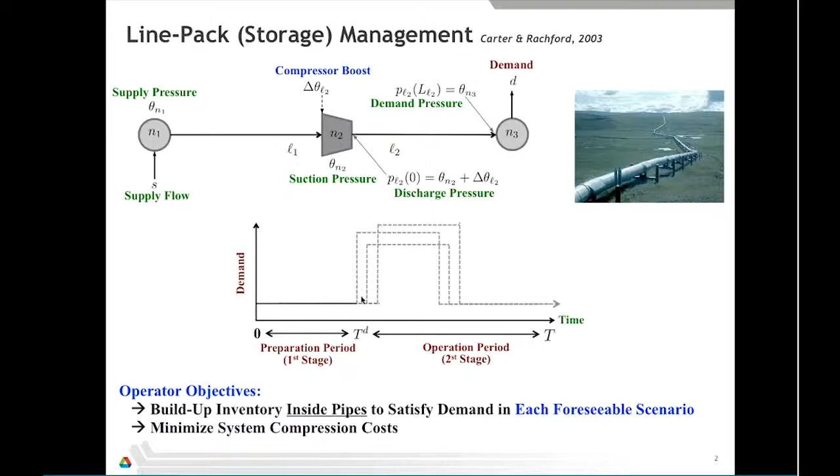Right, so that is the basic setting. Why are we looking into this problem?

I honestly think that one of the big reasons why the gas market is so important for all of us is because it's tightly connected to the power grid. One of the big issues the power grid is facing right now is that they still have very drastic, non-negligible fluctuations of prices. Here I'm showing you some prices for the Illinois system in 2009. It's very typical to observe these very high spikes of electricity prices. In Illinois we have an average price of $40 per megawatt, but this price can go as high as 200 to 300 in certain periods.

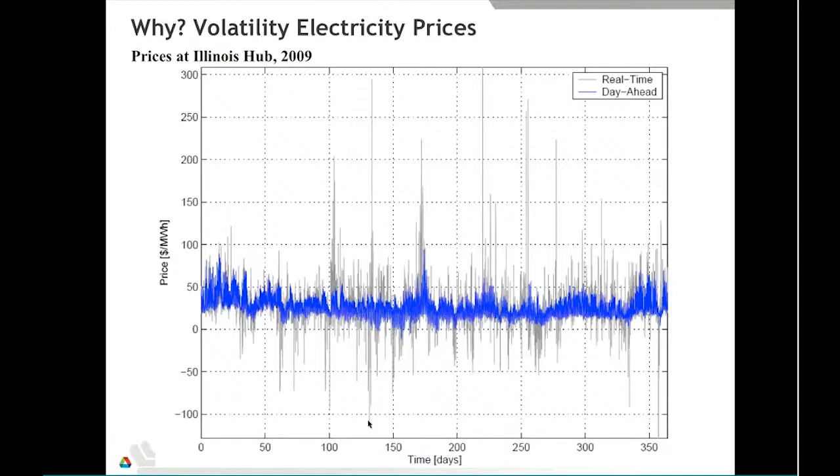Prices can actually become negative, which seems a little absurd, but it's true, because you have periods or moments—it doesn't have to be a long period of time, you can have time instances of 5 minutes, let's say, where you actually have too much electricity and you need to pay people to use it. So this is not uncommon to have. This is an interesting problem.

Volatility in the power grid is also observed not only in time, but also in space. So when you have periods of scarcity, because you have, for example, transmission lines that are congested, or power plants that cannot ramp up or down sufficiently fast, then you get these periods of either scarcity or excess, and that's what drives prices.

During a period of high stress, the price field just distorts completely, and you can have very weird price profiles. So, for example, here what you see—and these are real prices, so I want to scare you a little bit—essentially, somewhere around here in Iowa and Wisconsin, you can observe a price of around $1,000 per megawatt. And somewhere here in Illinois, we're observing prices that are exactly the same magnitude but negative—minus $1,000 per megawatt.

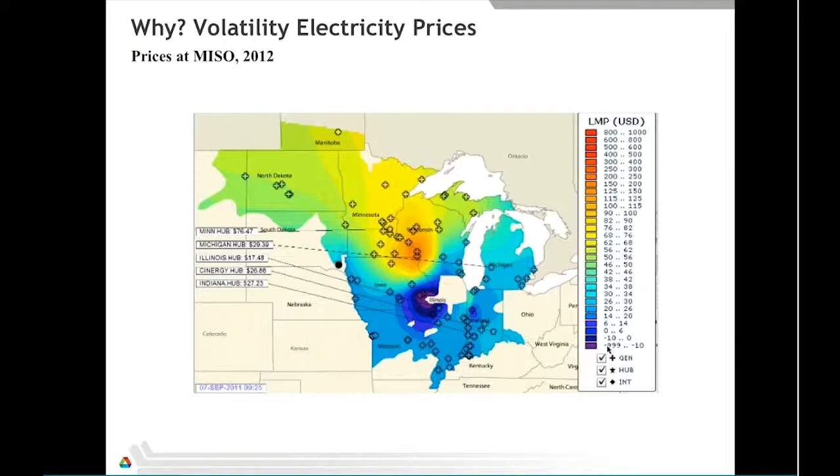So what is happening is that nowadays we still have a lot of very extreme volatility in prices. One of the reasons for this is that it's a typical problem that we don't foresee enough how things are going to happen. We don't get ready for it, we don't prepare, and then we end up positioning these power plants in places where they cannot ramp up or down, and that creates these periods of scarcity, which creates these very strong distortions in prices.

So things are getting worse because of wind power. The unique feature about wind power is that the uncertainty profile it follows is something we have never seen in history. Demand profiles are actually quite predictable—there are some uncertainties, but this is strongly linked to behavior and ambient temperature, and people have beaten that problem to death. But the problem with wind power is that it depends more strongly on other meteorological factors, and it's a little more complicated to predict. So here I'm illustrating some wind ramps, how typically they can simply go completely from a 50% ramp down of total capacity within an hour.

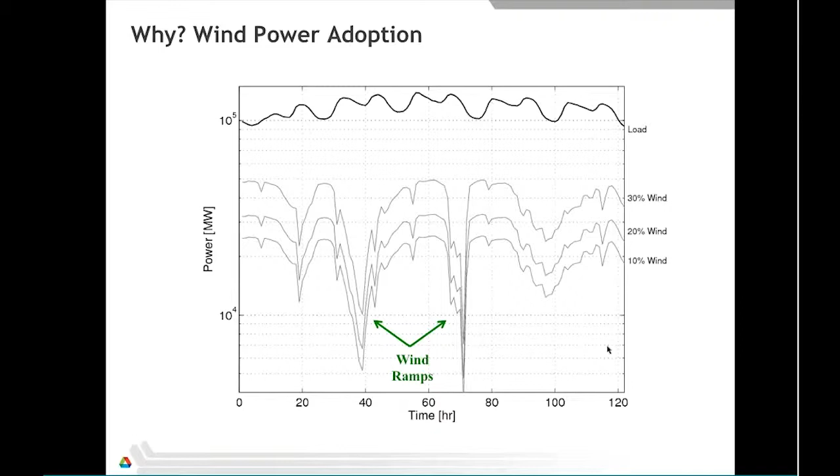This is one of the reasons why natural gas is becoming very important, because in places where you have a lot of wind power, you also need some sort of natural gas type power plant, because those power plants can start very quickly—things like combined cycle power plants, called ramping units in the power grid. So I'm essentially trying to frame why we're looking into gas pipeline optimization. I think there are very interesting synergies between natural gas and electricity that open a lot of opportunities for us chemical engineers, optimal control people, and optimization people.

Some of the challenges and opportunities of this interaction of natural gas are the following. As I mentioned, gas is essential to enable large adoptions of renewable power because of combined cycle plants.

Electricity markets actually drive a large fraction of gas markets precisely because of the real-time market. People that own combined cycle plants are actually looking for periods when the spot price or real-time price just goes to a very large value, like 1,000. That's when they make their millions of dollars. Seriously, just by operating within an hour, they can make a lot of money. So there are some very, very strong economic incentives there.

Some of the challenges is that natural gas loads are very different from power grid loads. They are somehow connected in a weird feedback loop with electricity markets, because the electricity market is doing what it's doing, and then at some point when they clear the market, they're going to decide to allocate this combined cycle plant, and without much notice, they're just going to start the unit. Then the gas pipeline operator has to figure out what am I going to do next. So forecasting or modeling these uncertainties of demand for natural gas is very hard.

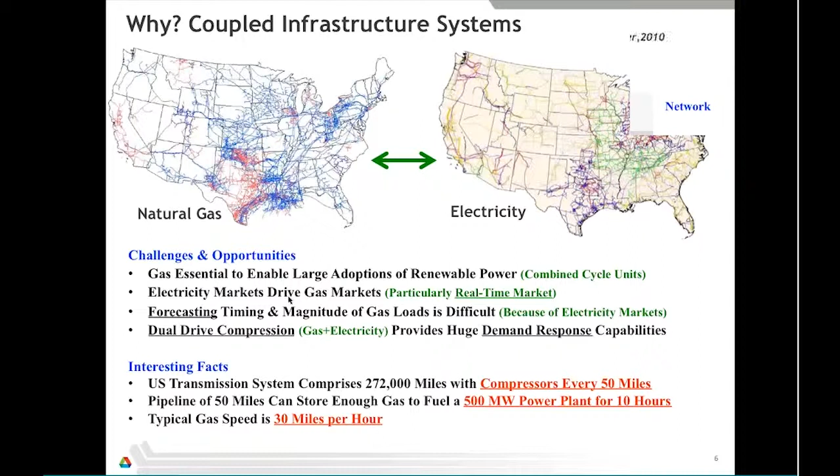So let's move on. Don't pay attention to all the equations at the same time, because I always make this mistake, it's part of my nature of putting all the equations there. But essentially, let's go line by line.

Essentially, we're talking here about a large network. The network has these balances in each one of the nodes, so you can think of multiple links and multiple nodes. The links are going to be the pipelines, and the nodes are going to be potentially compressor stations, or simply nodes where the pipelines have their junctions.

So here I'm defining these inlet and outlet flows for each one of the pipelines. Each one of those pipelines has a flow coming in and a flow coming out. For a particular node, you can actually have supply flows, and for certain particular nodes, you can have demand nodes, or demand flows, I'm sorry.

So I'm also here specifying these sets. This set N is the set of all possible nodes in the network. T is a set of times, or time steps. Omega is a set of possible scenarios. So here I'm essentially specifying my physical model for each possible scenario, and later we'll figure out how do we actually make the decision under uncertainty.

Now, the dynamics of each one of these lines, which makes this network different from power grid networks, is that you actually have dynamics that are significant, you have conservation and momentum equations. So in one dimension, it actually looks something very simple. It's computationally complex, but it's actually not that terrible.

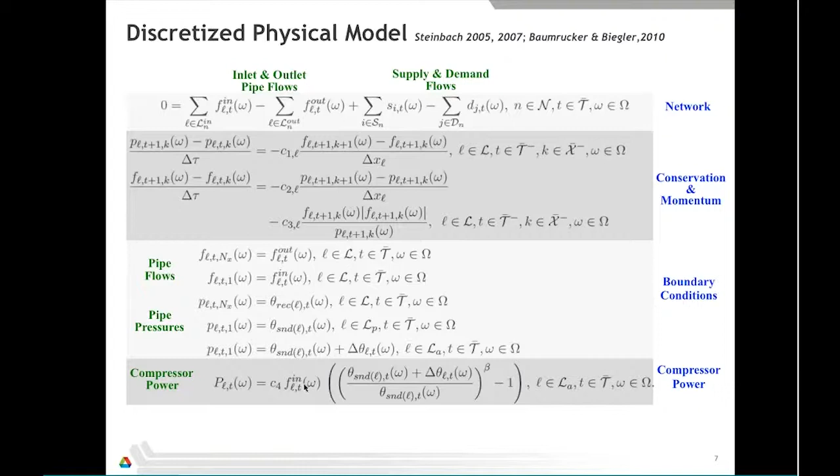Now this model is specified for each possible scenario. You have time and space dimensions. So let's move on. What makes this problem interesting from an optimal control standpoint is how do you actually determine what are degrees of freedom? What are controls and what are my states?

This becomes very important because when you have a DAE system, for certain types of models it's easy to specify initial conditions. But for certain types of problems, it's actually very hard to specify consistent initial conditions. So this is why you have to go to the trouble of characterizing the model.

So essentially, the variables that you have in the system, this is the total number of variables. You don't have to remember all these details, but essentially it's 2 times the number of links times the number of discretization points in space, plus 2 times the number of links, number of nodes, number of supply flows, number of demand flows, and number of active compressors. The number of equations is that many. So what that means is that the number of degrees of freedom is the number of supply flows, the number of demand flows, and the number of compressors that you have.

Typically, the operator does not have control over supply flows or supply pressures. Someone else is sending gas for him, and the supply pressure is already fixed. So that actually kills a degree of freedom, or a set of degrees of freedom, and that just leaves the degrees of freedom to be the total number of demand flows and the total number of compressors.

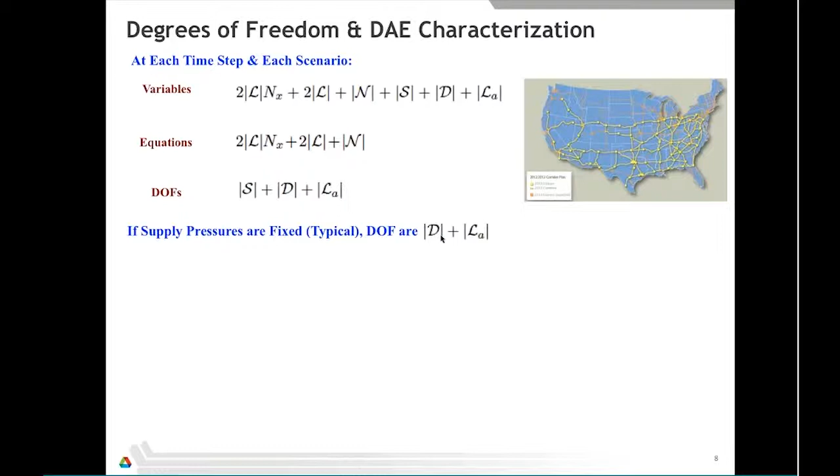So what are the implications of this little analysis? Well, one of the issues here is that you cannot fix demand flows. So you might think, well, I want my system to operate and I'm going to fix the demand that I want. Well, if you do that, and on top of that you say, I want this demand flow and I want it at this pressure, it turns out that if you specify those two constraints, the system does not have enough degrees of freedom. That is impossible. There's no way of satisfying the full set of constraints if you want to be overly aggressive.

So typically what people do is they say, well, I want my demand flow to be fixed, and I'm going to allow for a range of demand pressures that I'm going to allow you to be around. This range can be very narrow, but I'm not going to just fix it for you. So that's an important thing.

So if you fix the flows, then it turns out that the supply flows and the demand pressures actually become algebraic states. This is actually counterintuitive, because you might expect a supply flow to be a control. Well, in this case, it's not. Once you specify the demand flows, your supply flows become states. You have no way of touching them. So the controls are really the boosts for the compressors.

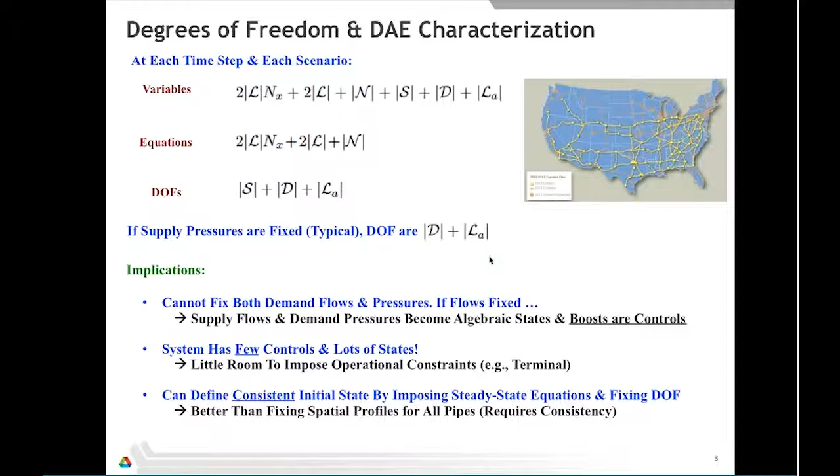All right, the objective function — this is a very interesting problem. This is a very complex PDE constraint optimization problem. The nonlinearity is strong, you have a lot of variables, a lot of ill conditioning. So you have to be extra careful about how you want to enforce your constraints, because these problems tend to be ill-posed. What that means is you might have a multiplicity of solutions — things that give you the same objective function — and the solver struggles a lot with this. But one of the most important things here is how do we actually enforce the constraints.

And this is where constraint softening is actually quite important. So actually I don't enforce the demand flow as a constraint — I enforce it in the objective function. The reason is that, because of the dynamics, there's really no way you can actually enforce the demand at each point in time. Just think about it: if at a certain point in time there's a step function for the demand, then essentially you're always going to have this transition in the dynamics where you cannot fully satisfy the demand. So that constraint becomes very troublesome, especially with very steep variations of demand. That's why I put it in the objective function.

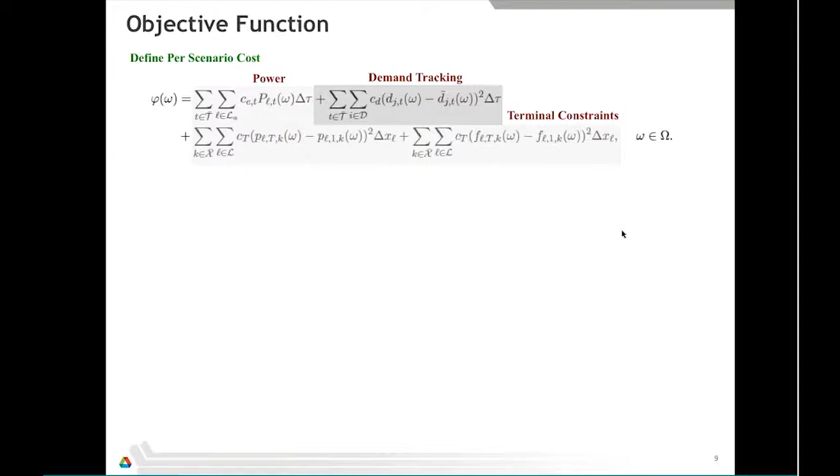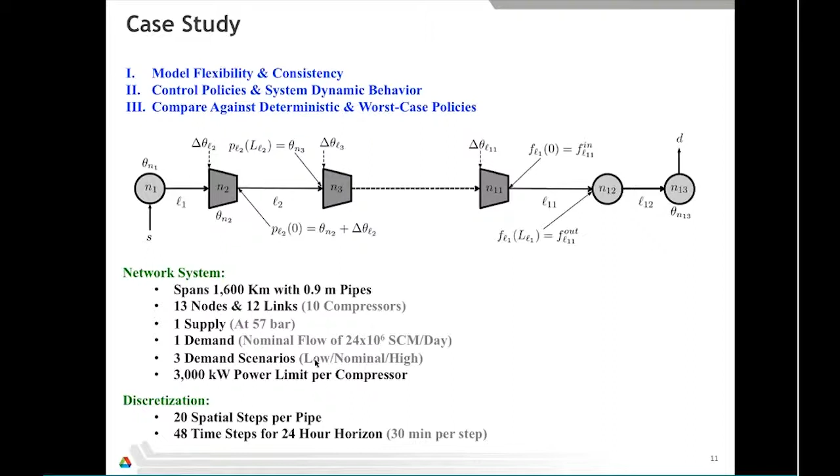I'm going to explain how this works. You have three demand scenarios: a low demand scenario, a nominal scenario, and a high demand scenario. I'm going to limit the amount of power you can put into each compressor to 3,000 kilowatts. I'm going to optimize over a horizon of 24 hours with a 30-minute time step, giving 48 time steps, and I discretize each line by 20 spatial steps.

So how does the policy look like?

This is the stochastic policy. Essentially what you assume in this case is that you have a preparation period, a period of time where the operator can start storing the gas and has to figure out the best policy for doing that. It allows it to store the gas, and then at that point in time, uncertainty becomes revealed. So you have a period where you know how the system behaves, probably at night, and then at a certain time, usually peak time for electricity, things are going to reveal about what we're expecting.

So this is what you see. The non-anticipativity constraint is saying: I only have one control policy up to this point in time, then uncertainty becomes revealed, and I'm allowed to compute recourse actions after that time step. This is why you see three different profiles for power, for two different compressors. You also see that the compressor returns to the original position, meaning the terminal constraints I was imposing by fixing the spatial profiles are doing what they're supposed to.

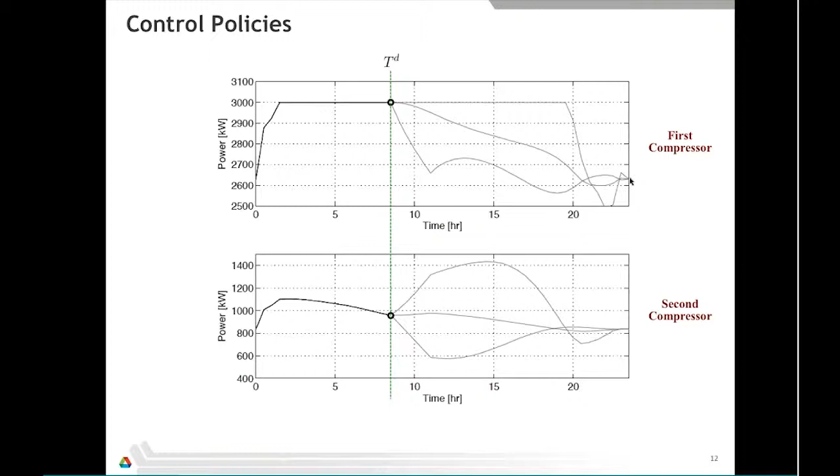This is how the actual profiles of flow look inside the pipeline for three different scenarios: low demand, nominal demand, and high demand. For low demand, things are actually pretty stable. You start at a steady state — this horizontal line — and each one of these level curves is essentially one point in time.

All these gray lines are saying: up to the time where I know the system is certain, I've observed this demand, and the demand is at the end of the pipeline. So you see that each of these level curves converges to that demand, meaning the system is actually satisfying the demand.

Now in time, because you're pressurizing the system and building up inventory, this is why you see these level curves building up. It builds up inventory at the beginning, downstream the pipeline and upstream the pipeline.

So at some point in time, uncertainty reveals. In this case, the scenario tells you: okay, I was at this steady state, now I move to this low demand steady state, which is a little bit higher. If that happens, the system has to transition there, and the optimizer is actually capable of transitioning to the new demand point — it's not a steady state, it's all dynamic.

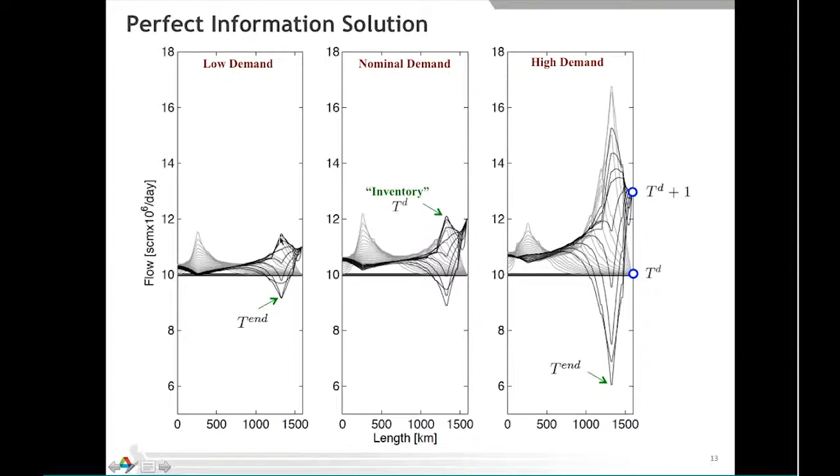Now you see that you build up much more inventory in this case. You see these three peaks compared to perfect information — imperfect information — this is how much you build here, how much here, and how much you build up here. Because you have perfect information, you don't have to build up as much inventory, but in this case you have to store much more gas.

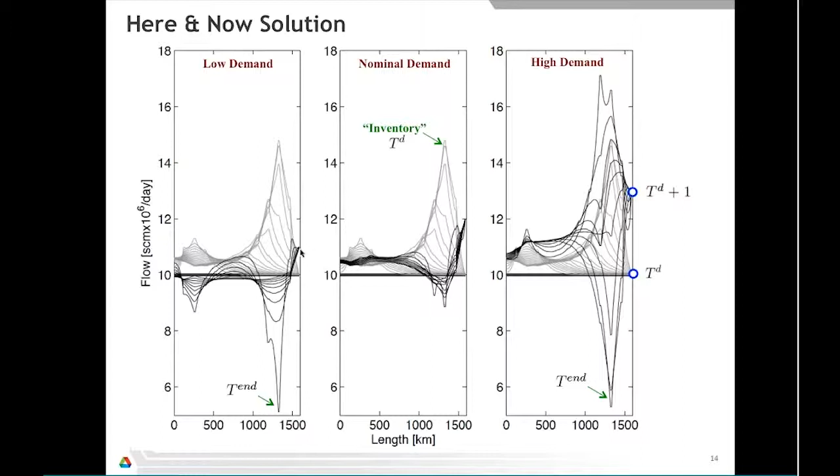Something interesting and kind of unique to dynamic systems: if you build up a lot of inventory and the low demand scenario realizes, the system has a lot of gas in there, and it has to transition back to the state of the low demand scenario. This transitioning back is actually non-trivial — it involves a very fast, very strong time transition. This is unique because in most stochastic optimization models you say, okay, I'll build up inventory and then just use it. But if you don't model the dynamics of that inventory, you can actually constrain the system. The inventory — you cannot just use it, right? It's governed by certain physics. So when we deplete a storage tank, you just don't deplete it arbitrarily; you actually have to be careful.

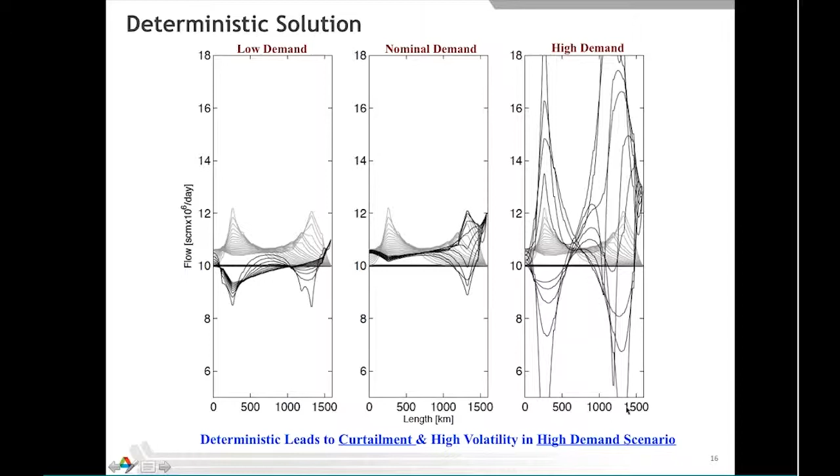Now the robust solution is interesting, and I have two more slides. This is one of the most striking things I found in this study so far, because robust optimization is a technique that makes sense for risk-averse operators. You say, well, I'm an operator, I just want my system to work, and I don't care much about economics — I'm paid day by day to operate this thing. So I'm going to do worst case: I'm going to build up inventory as if the high demand scenario is going to show up.

So you build up a lot of inventory, and because of this dynamic problem I was telling you about, it's interesting. If the high demand scenario reveals, you're fine and operate very nicely. But if the low demand scenario realizes, the transition from high to low demand is very strong, and you see this issue of dry out, where it's actually not possible to go back, or it is possible but it involves a very strong transition that stresses the system significantly.

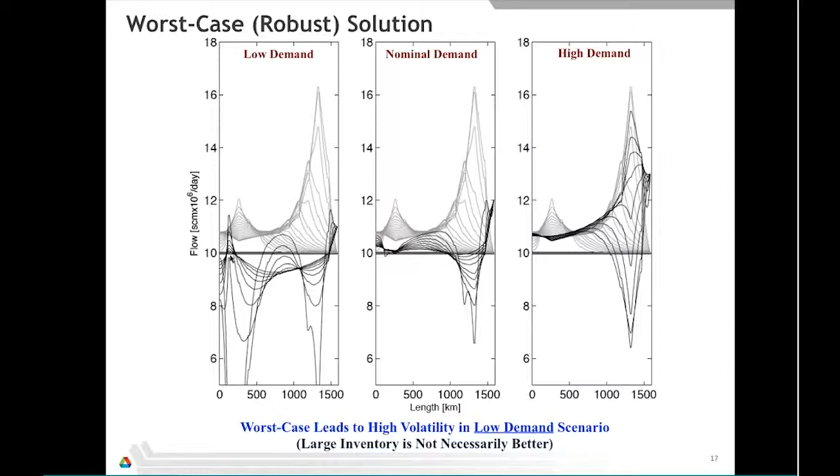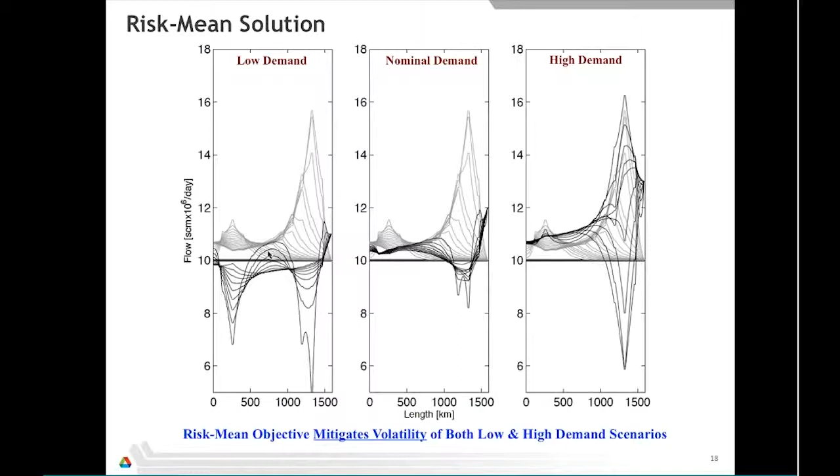The CVaR actually gives you something nice. Compare the low demand scenario here—this is CVaR, and this is the worst case. It gives you something that looks very similar for low demand and high demand, because you have this trade-off. So this is a nice tuning that you can do with CVaR. It allows you to go both ways, and I think it's a nice tool, at least for the operator, to figure out where he wants to go.

From an optimization standpoint, I just want to tell you the typical story: it's a complex problem. Now you have PDEs. Something we have found is that the PDEs actually have to be discretized quite finely, because you tend to underestimate the amount of compression power that you actually need if you don't discretize it correctly.

So that's just asking for advanced optimization tools, which is something we're working on. But that is essentially what I have so far. Feel free to ask any questions, but if we don't have time, just feel free to write me an email. Thank you.